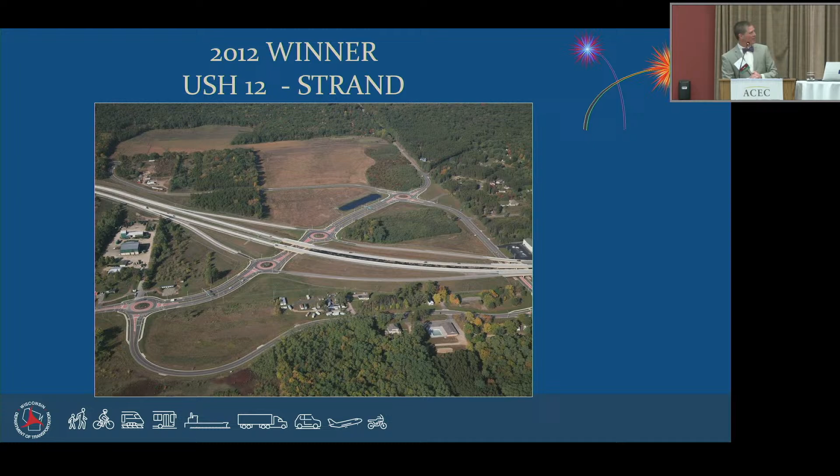13 years ago. Our presentation tonight, the purpose is twofold: to recognize the hard-working people, the teams who've created these projects, and to share some of these far-reaching and really quite different projects from all around the state. Another good field this year, we had 27 nominees. That's tied with last year.

We know from the employee survey that recognition is really important to people. This is just one way, and it's encouraging that you are putting your best foot forward to nominate your projects. Thank you very much to the judges who volunteered their time to review the nominations and judge them based on our published criteria. Thanks especially to Greg, Diego, and Nick, who were all new judges this year. Thank you. The only drawback with the judges this year, I happened to have 8, somewhat accidentally, and we'll see how that shook out.

The criteria for the contest, it's aligned with the department's priorities. We've looked again and again at these criteria year over year so that it's not just big projects that can win these awards. It's projects that find problems, they clearly identify problems, and find efficient ways to solve them. So whether you're taking home hardware today or not, you took the time to nominate your project, and so I'm pleased to be here to share it with the world.

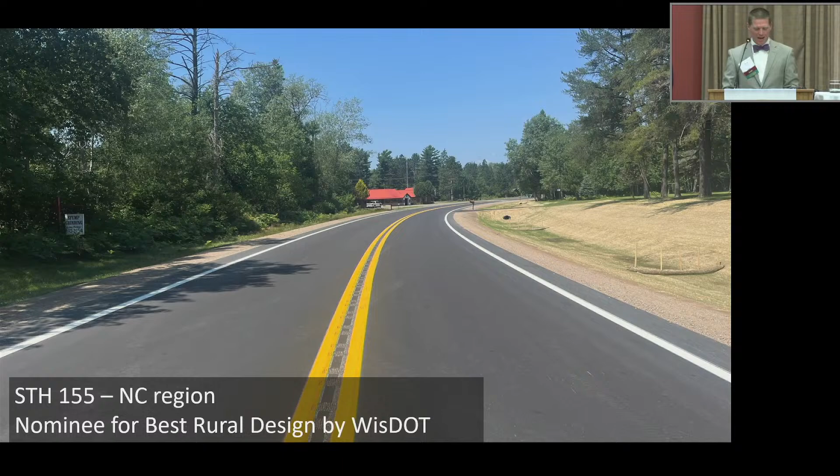All right, good. Well, who's ready to have a tour of Wisconsin's finest, shall we? Okay, our first category tonight, 4 nominees were in the Best Rural Design by WisDOT. Okay, here comes the text. The North Central region nominated State Trunk 155 in and around St. Germain, a scenic route symbolizing northern Wisconsin's beauty with rolling hills and natural waterways and sprawling forest. That is a quote from their nomination, thanks to Andy Casper and Stacy Hagenbutcher.

At its heart, this is a resurfacing project, but it also addressed a few specific problems, including flooding with right-of-way less than 15 feet from the shoulders. They used culverts and infiltration trenches to manage the water. The town of St. Germain contributed to shoulder widening, which will give people a place to walk.

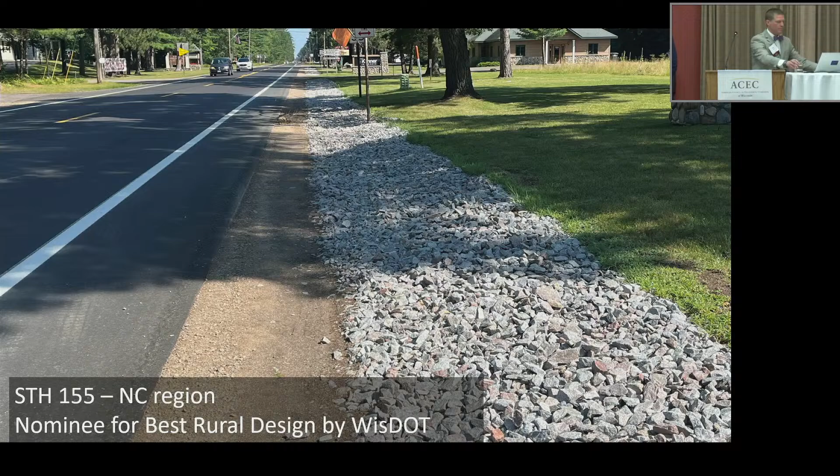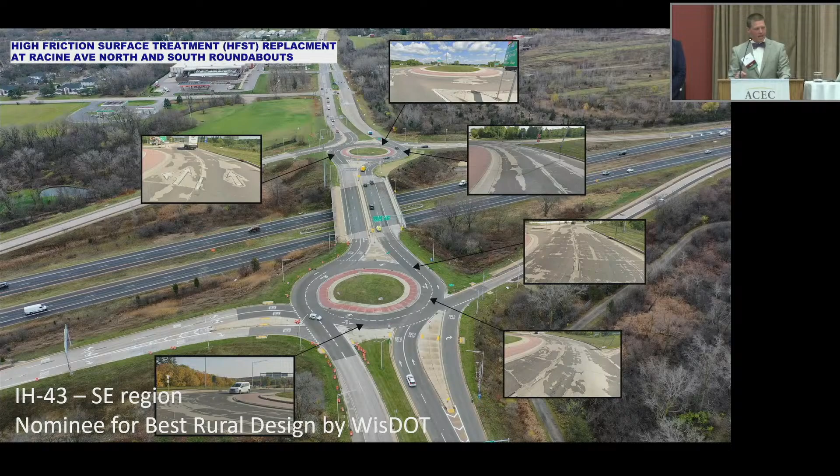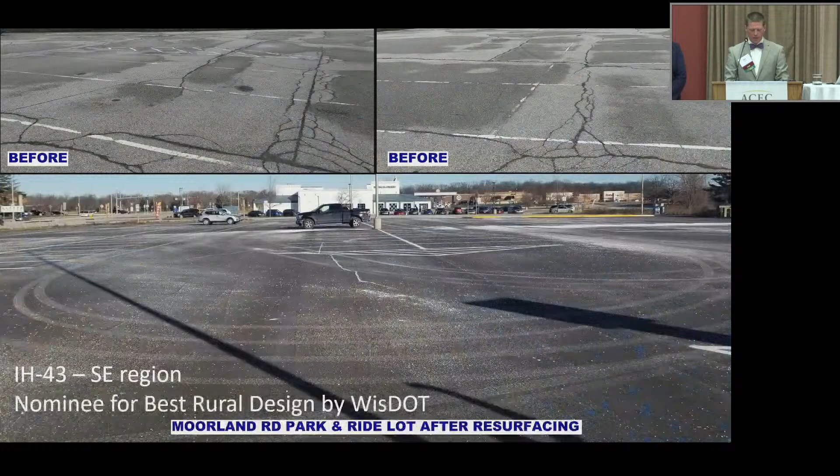The second nominee is a 6-mile project on I-43 in Waukesha County, sent in by Evan Limberatos and his team at Southeast Region. It was straightforward perpetuation, but the judges appreciated how each element was explained, each element had its purpose. Safety elements like new roadside hardware and a high-friction surface treatment were included, as well as updates to a park and ride and curb ramps. One thing that I thought was cool was specifying micro-milling for a portion of the shoulders so that when traffic was shifted onto them, it rode better and made less noise.

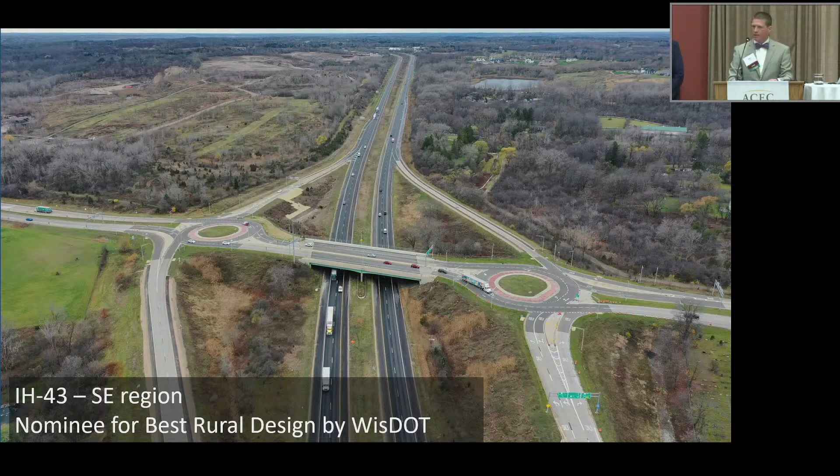Third, I'd like to share the Southwest region's State Trunk 58 project near La Valle. The main goal of the project, like many, was to extend the service life of the pavement. But the village of La Valle had suffered from flooding in 2018, leaving roads damaged and sidewalks disconnected. The project restored connectivity in 3 different small communities. The traffic control was designed for half at a time with temp signals to avoid a long and arduous detour. So thanks especially to PM David Schmidt and PL Anthony Johnson for your work on this project.

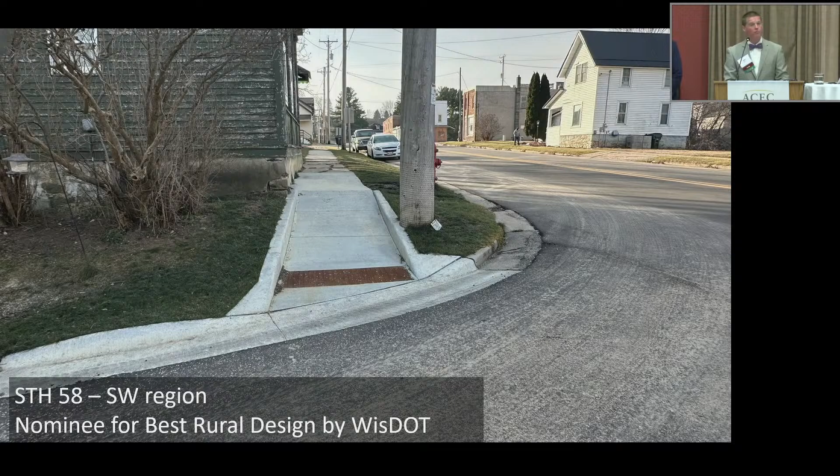The fourth nominee is the Northeast Region's project on State Trunk 15 and 76 in New London. It expanded 2.8 miles of rural principal arterial and caught the judges' eyes with safety improvements, access coordination, and tight bids. Well, come on down, Alan Farrell and Bill Bertrand. You are this year's first winners.

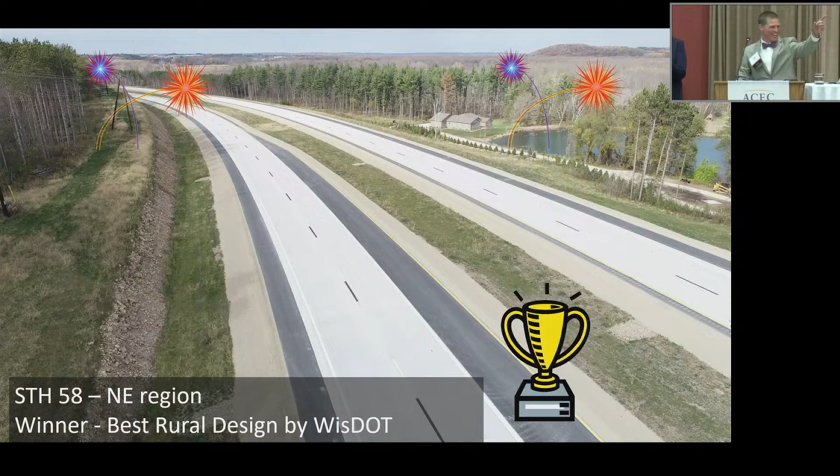Rural by WisDOT. One of the things we really want to hear about in the Design Award nomination is, what problems did you solve? And what alternatives did you consider? And while some people still really want to write no build, resurface, reconstruct, here's a good example of the kind of specific thing that we're looking for.

There were similar efforts with a concrete production facility and a landscaping nursery and other neighbors, balancing access and highway safety. In the end, 14 out of 45 driveways were able to be removed, which is expected to reduce the higher than average crash rate. The design team also worked through railroad coordination, rock excavation, and more on this $15 million project. Congratulations, Northeast Region.

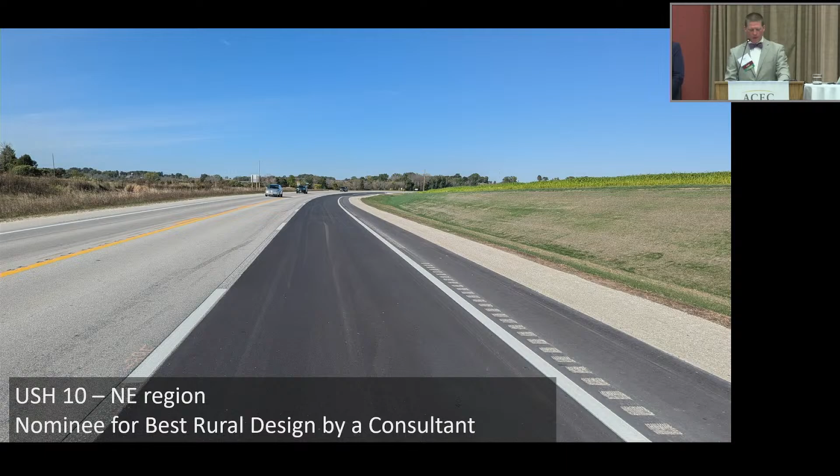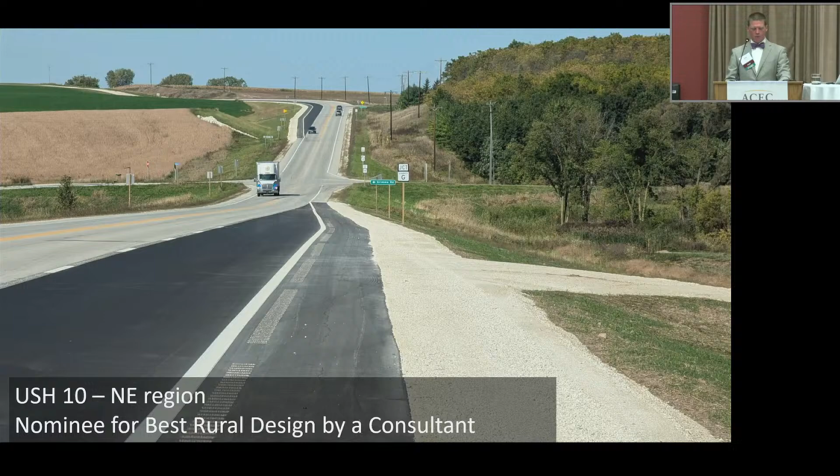All right, our next category is Best Rural Design by a Consultant. Let's head over to the consultant side of the house and look at 4 more exemplary projects. Northeast Region nominated their US 10 passing lane project in Manitowoc County. This was a $3.4 million project on about 4 miles of a major US highway, carrying 22% trucks, but usually only needing 2 lanes. It implements a portion of the statewide plan for designated passing lane corridors. Overall, the scheme is an efficient way to add capacity without extra rebuilding.

One specific decision was to collect rock data. Minimizing impacts to rock helped the project avoid an estimated $500,000 of cost. Well done, Stephanie Christensen from EMCS and Brian Hain from WisDOT. The next project had been in the works for 20 years before Valbon Latifi from Bloom and Robert Bellin from WisDOT brought it to fruition.

I'm not pointing any fingers, guys. I hear chuckling up front. That's how it goes sometimes.

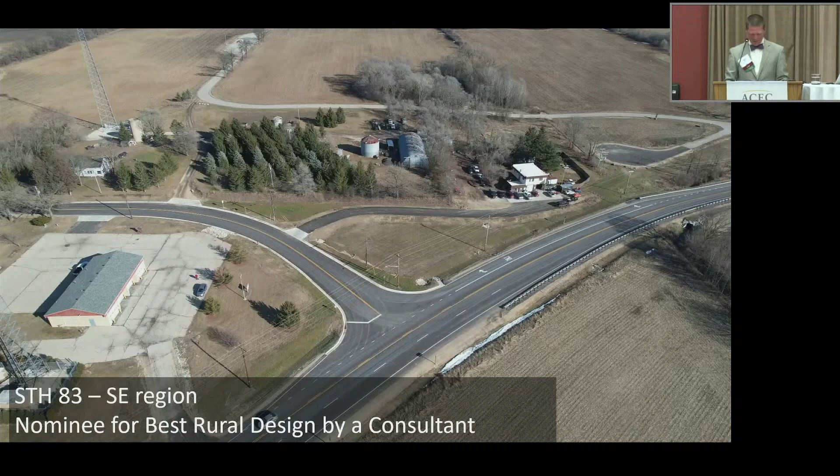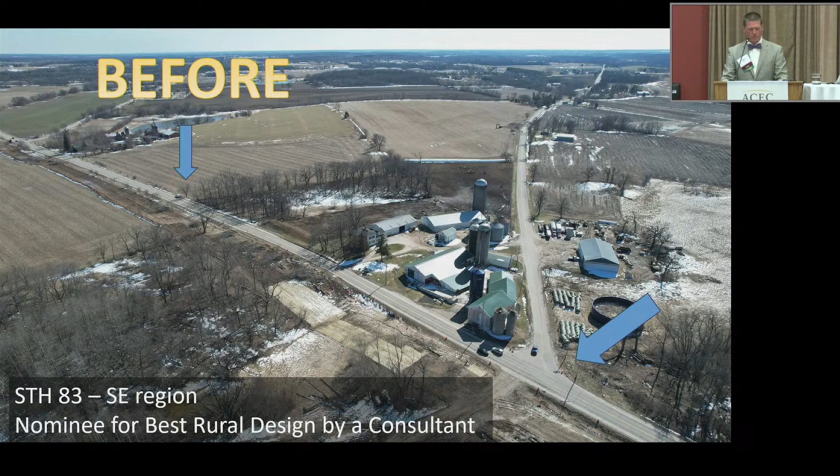It's Highway 83 between Waterford and Mukwonago in the Southeast Region. 3 intersections and 1 horizontal curve were reconstructed, and the rest was resurfaced, focusing the work on areas with crash problems. One example was the Honey Creek intersection. It was moved 950 feet to the south, the driveway opening was provided to the new alignment, and new beam guard was placed at the old intersection to delineate and reduce impacts to the farmer's property.

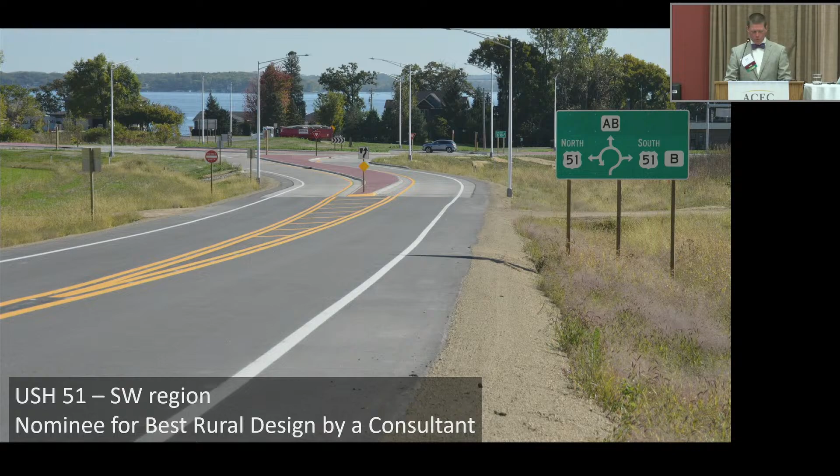Strand and the Southwest Region nominated the intersection of US 51 and County AB in the town of Dunn. This intersection received HSIP funding on account of its high crash rate and was rebuilt from a 2-way stop to a single-lane roundabout. The $3.3 million project attracted 7 bidders, the lowest of which were less than $20,000 apart. Thanks to Kyle Henderson from Strand and Jenny Coburn from WisDOT for this nomination.

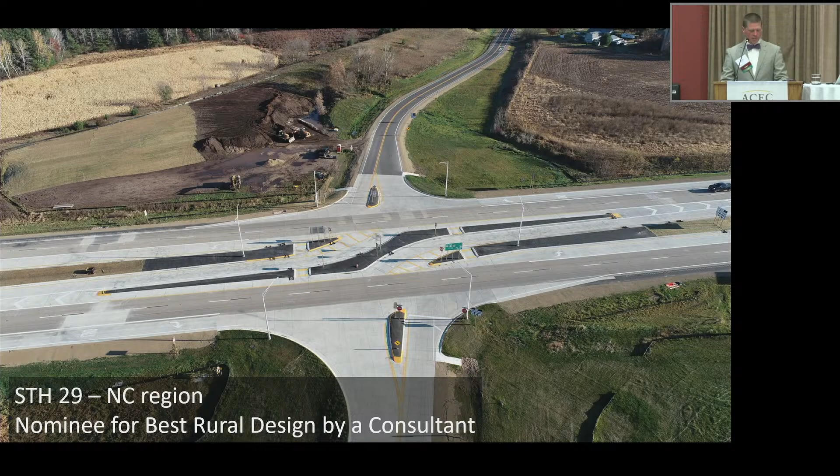Finally, we have the North Central Region's nomination, State Trunk 29 in Shawano County. This new J-turn configuration specifically targets an ongoing trend of severe crashes while staying consistent with the long-term vision to convert 29 to a freeway. Well, ladies and gentlemen, come on down. Eric Olson from EMCS, Kai Keelan, and Evan Maves from North Central Region. You're the winners. Evan, come on down. There's a number of great things to highlight about this project.

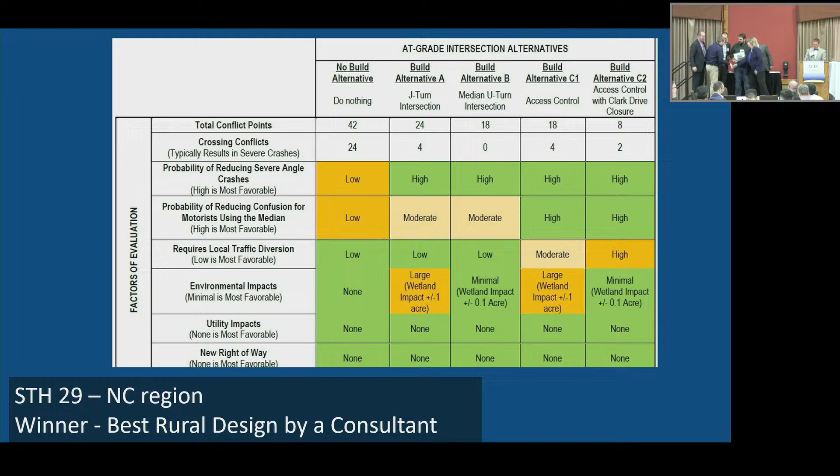It was driven by safety first and foremost. State Trunk 29, it's an important arterial with 27% trucks. County Triple M is a connection to the city of Shawano. It used to come in at a 63-degree skew. 4 at-grade alternatives were developed. They were also presented in the nomination in a convenient chart. Although not warranted at this time, an interchange concept was developed to show and talk with the public about. The J-turn, it maintains access, reduces conflict points, and does not preclude those future alternatives.

2 details I'd like to note quick. Offset right turn lanes were evaluated, but were not included because the volumes were low, and this wasn't part of the problem. So the decision to not include this work reduced impact and saved us about $250,000.

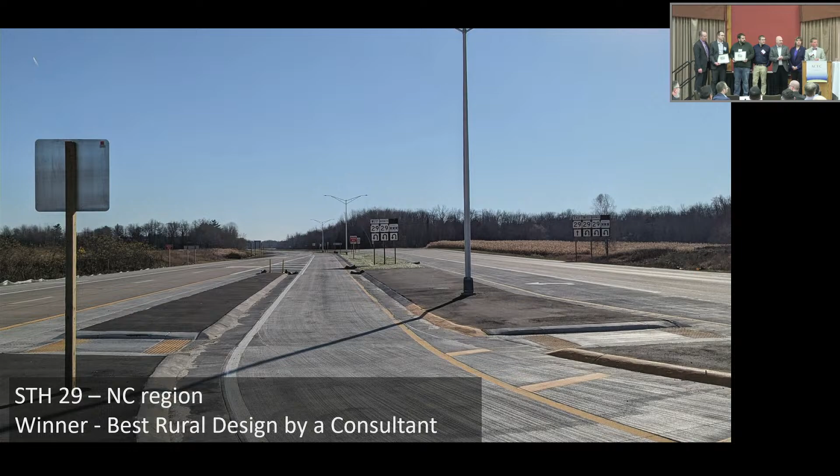And then finally, just a little detail here. Many of you have seen this already, but in case you haven't, with an intersection like this, even though it's rural, you might expect some people to walk or bike along the minor road. So the design includes these little cut-throughs in the medians, which are a really low-cost way to avoid creating a new barrier with our project. Congratulations to the State Trunk 29 design team.

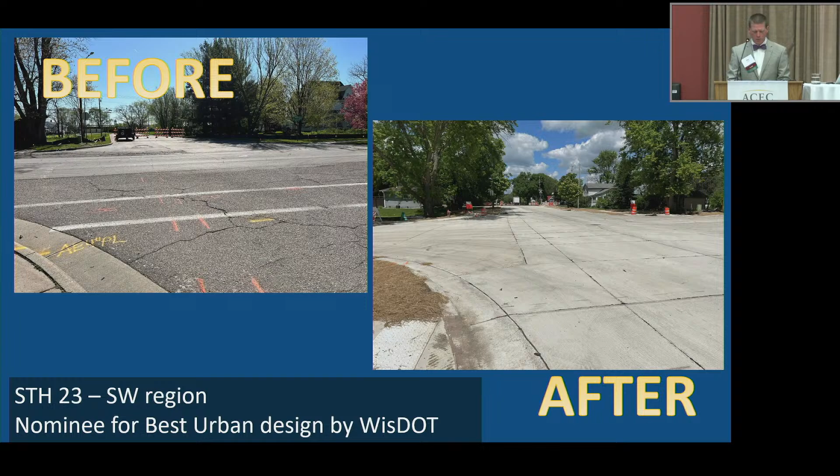All right, let's have a look at urban projects. Urban project designed by WisDOT was the smallest category this year, so let's have a look at these nominees. Southwest Region and Joshua Kaepernick nominated State Trunk 23 in Sauk County. It's a prominent corridor to the vibrant tourism destination of Spring Green and the only way to access a local industrial park. It's mostly mill and overlay with some reconstruction, including the Madison Street intersection. The nomination reports on cost savings from building this intersection under a full closure.

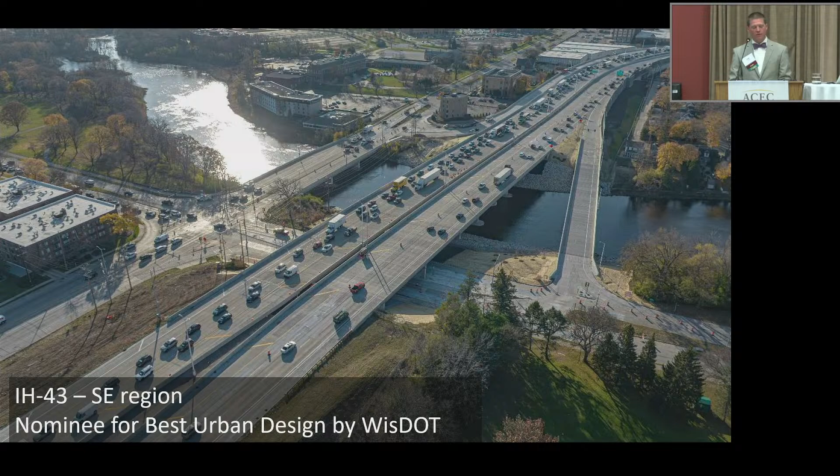The second nomination comes from the Southeast Region, a complex 1.4-mile interstate reconstruction of I-43 north of Milwaukee. Come on down, Dave Pittman and Roberto Gutierrez. You're this year's winners.

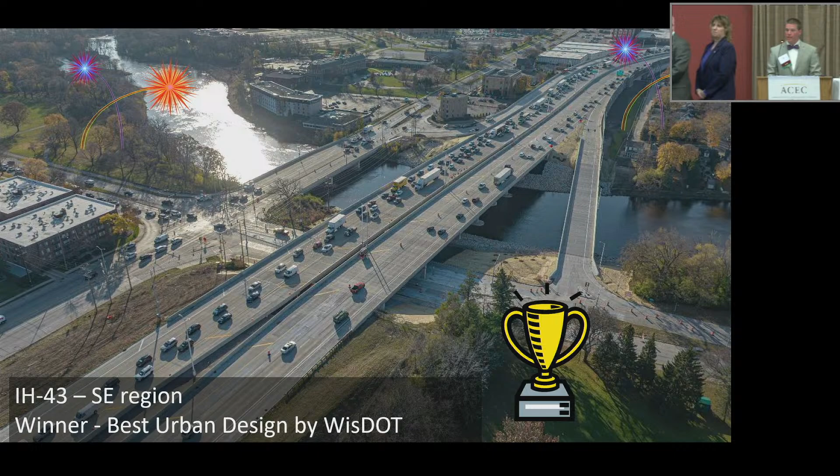This project most notably removed an old bridge above the abandoned Union Refrigerator Transit Company rail yard and replaced it with a lowered section of roadway between 2 retaining walls. They analyzed many components, including profile, ramps, bridges, and more. Removing an old 1,500-foot bridge will certainly reduce ongoing maintenance. I remember this project from our value engineering study back in 2019, which yielded about $6 million in cost avoidance.

Although I wonder why you guys didn't put that in your nomination, but nevertheless, a proposed alignment shift meant acquiring and moving 2 cell towers. I thought this was interesting. A cell on wheels device was used during construction to maintain that service. A portion of a cemetery was acquired, which included hiring an archaeologist and some design adjustments.

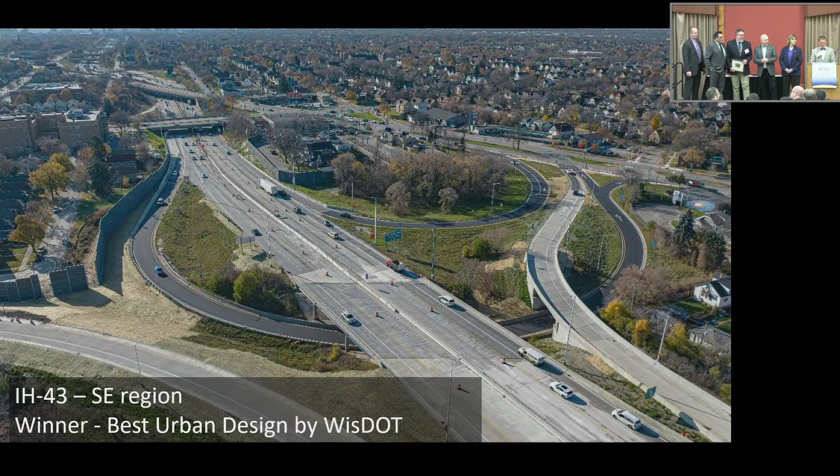And then finally, as you might expect in an urban area, popular trails cross this area as well. So with the removal of the bridge came a new barrier, mitigated with a new culvert that will serve as a trail underpass when the trail is built along that old rail line. Congratulations, Dave and Bob and your team.

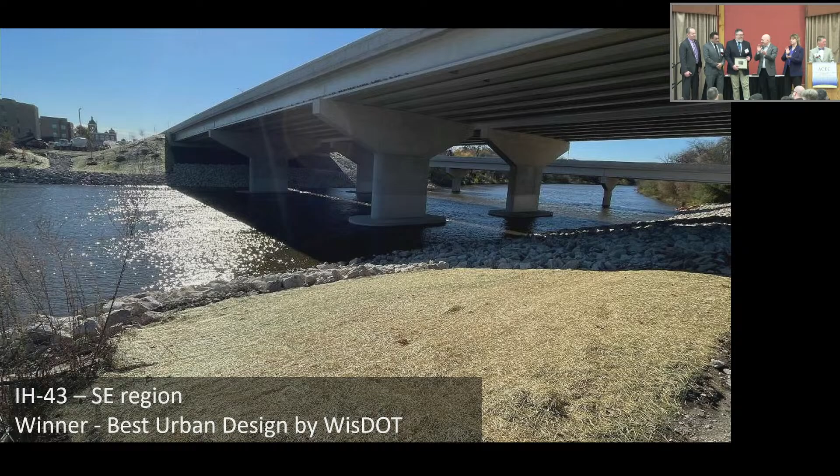Our next category is Best Urban Design by a Consultant. We have 4 strong projects in this category. Let's have a look. We'll kick it off with North Central Region, where State Trunk 80 was the nomination in Babcock. In this nomination, Jim Wendels calls the project small but mighty, and he's right. Along with WisDOT PM Preston Bone, Quest delivered a project that realigned a 10-mile-an-hour curve in this small town while resurfacing 5 miles of rural highway. Before the project, there were no crosswalks across State Trunk 80 and no pedestrian access to the post office or town hall. The judges appreciated the discussion on sub-alternatives and elements of performance-based practical design throughout.

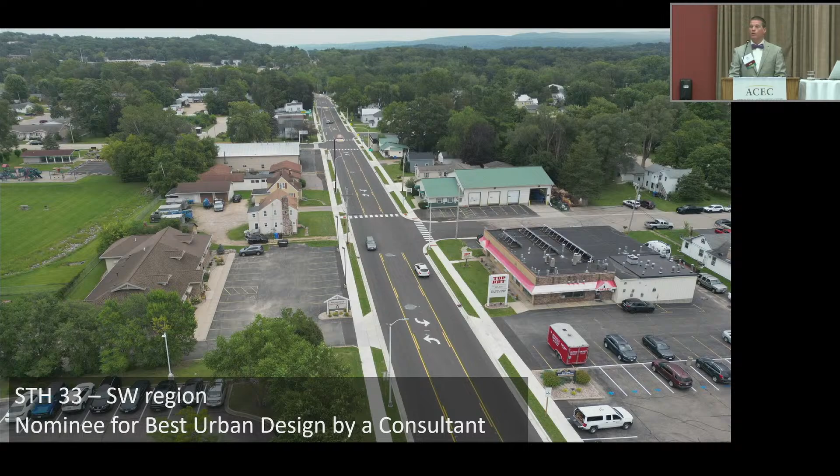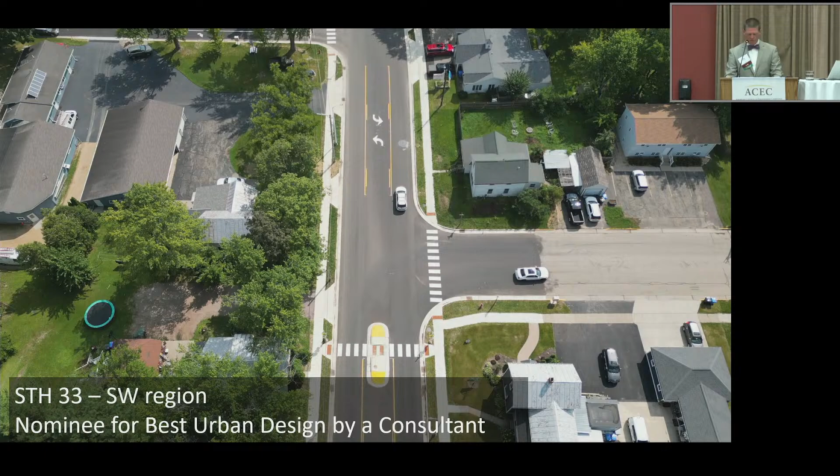And the second nominee is State Trunk 33 in Baraboo, sent by Brett Peterson at OES and Greg Brecka of the Southwest region. In the course of this pavement replacement project, the lanes were reconfigured from 4 to 3, a classic road diet that's expected to reduce crashes while maintaining or even improving access with a good level of service. The urban setting included 150 new curb ramps. As you know, probably the strongest thing about a road diet is all its safety benefit for cars and pedestrians within the existing footprint.

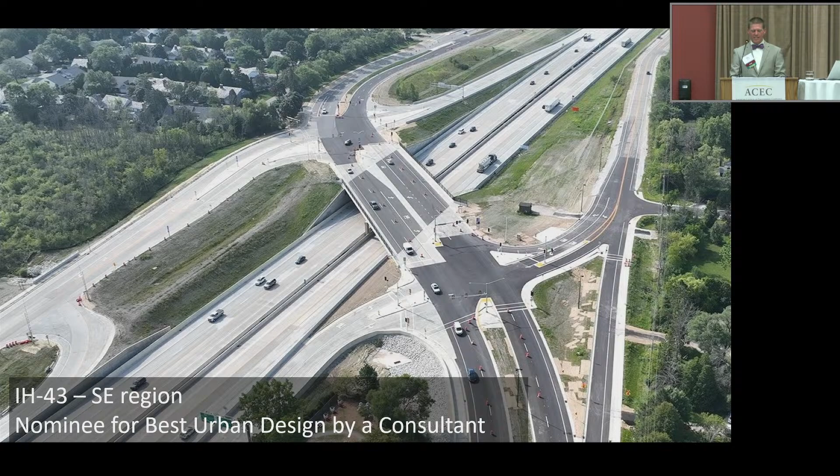Our next nominee comes from the Southeast region, the I-43 County Line Road interchange. It also includes a road diet and box culvert work, strategic staging, and complex geometry. And it's this year's winner. Come on down. Ryan Yankee from HNTB, Gary Ferguson from Jacobs, Steve Hoff, David Wen from WisDOT. And of course, if you're in the audience tonight and I call some names and you belong up here on the stage, please come on up. If I did not call your project, please refrain.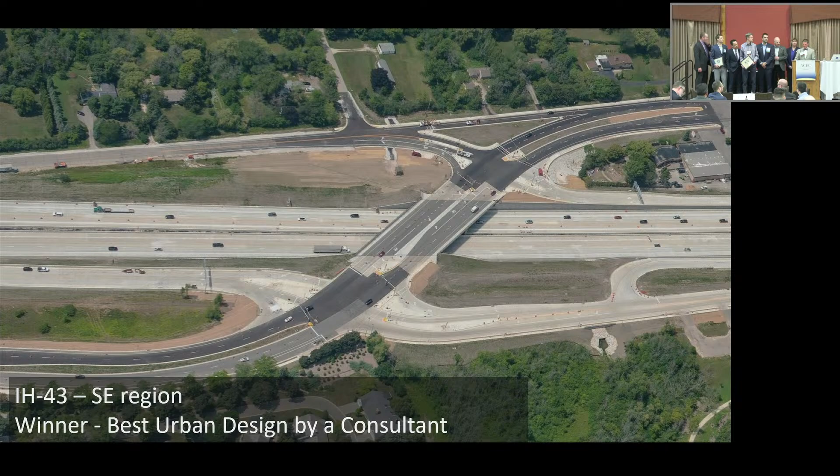This design on I-43 in the Southeast looked at numerous interchange alternatives driven in large part by FHWA's requirement for a full access interchange. The existing I-43 alignment under County Line Road had a substandard 60-mile-an-hour compound curve, which was improved to 75. Safety improvements were made for both vehicular and pedestrian traffic, including a new shared use path in coordination with the locals. Environmental impacts were mitigated with incorporating measures such as stormwater management, reducing impacts on wetlands and 4F properties. Finally, a reconfiguration on the local Port Washington Road is expected to better serve the community and promote accessibility. Congratulations to the I-43 team.

But wait, if you're keeping track at home, I've announced a winner, but only 3 out of the 4 nominees. Well, ladies and gentlemen, for the first time I've ever been a part of, the judges went round and round, and we concluded it's a tie. The Northeast region, State Trunk 54 in the city of Seymour is also the winner, so come on down, Kevin Kulo and Troy Robillard from Ayres, Jesse Hansen and Tammy Rabe from WisDOT. Come on down, Northeast region.

Be recruiting one more judge next year. No, all joking aside, this is a great project. Thanks for coming down. I also learned that senior designer Phil Verville unfortunately isn't here because of a recent injury, so get well soon, Phil.

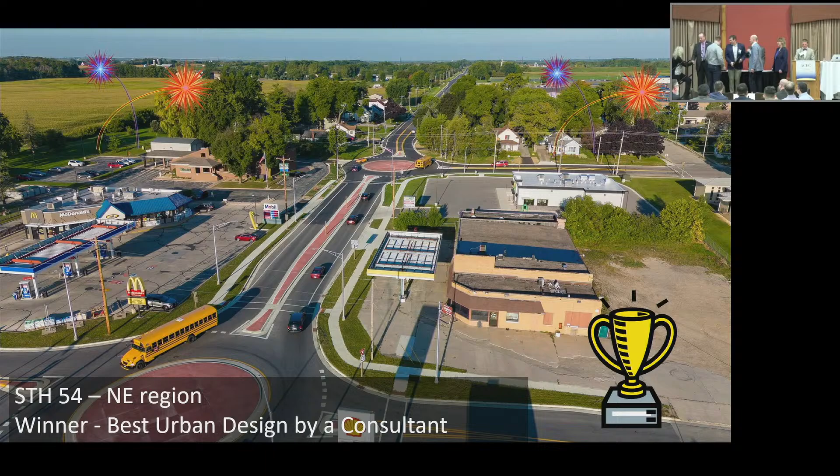This project is notable because it constructed the first and the second compact roundabouts on the state highway system in Wisconsin. Just look at these beauties. I think the project also included some resurfacing too, but the nomination didn't really expand on it, probably because they were so excited about the roundabouts. As you can see, this is quite a constrained area, and yet the 2 intersections had a lot of crash problems and problems with the level of service.

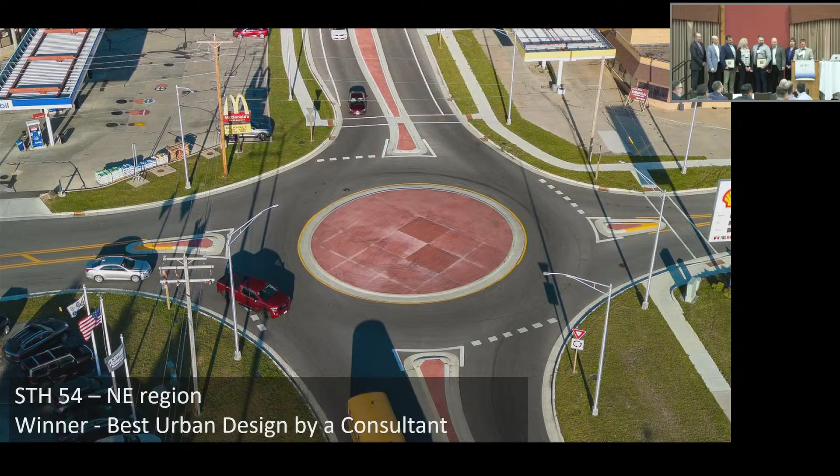These compact roundabouts are expected to reduce crashes and improve the operation while minimizing business impacts. You can also see that trucks are running through them just fine. Pedestrians will benefit from the new sidewalks.

And finally, I saw on the sign that Seymour is the home of the hamburger. I had no idea. Did you know this? I confirmed this with Google, and ChatGPT thinks it's New Haven, but did agree that Seymour has a legitimate claim. So either way, head on over to Seymour, see it for yourself, and if you miss it, just U-turn in the new roundabout. Congratulations.

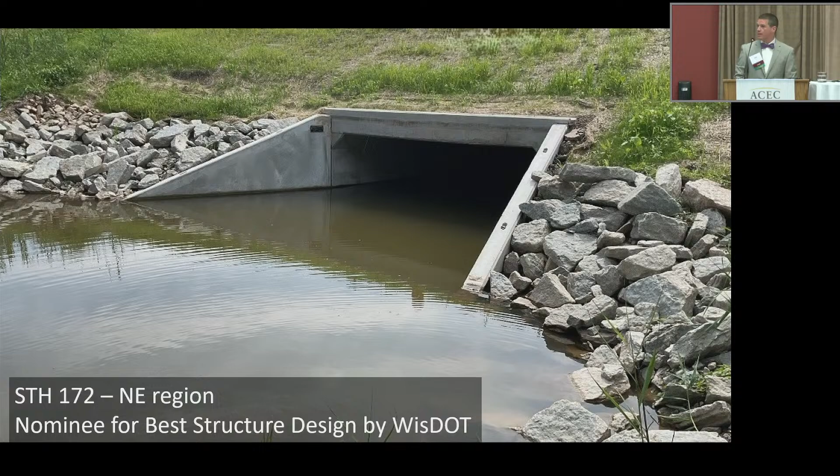Bureau of Structures and friends who love structures, get ready, because here come the bridges. First, by WisDOT, we have 4 nominees in the Best Structure by WisDOT category. First, Northeast Region nominated this new culvert under State Trunk 172 in Brown County. It's a great example of perhaps the most important key to success in a structure project: good collaboration between the Bureau and the region. The existing steel plate pipe arch was rusted out with some areas of 100% section loss.

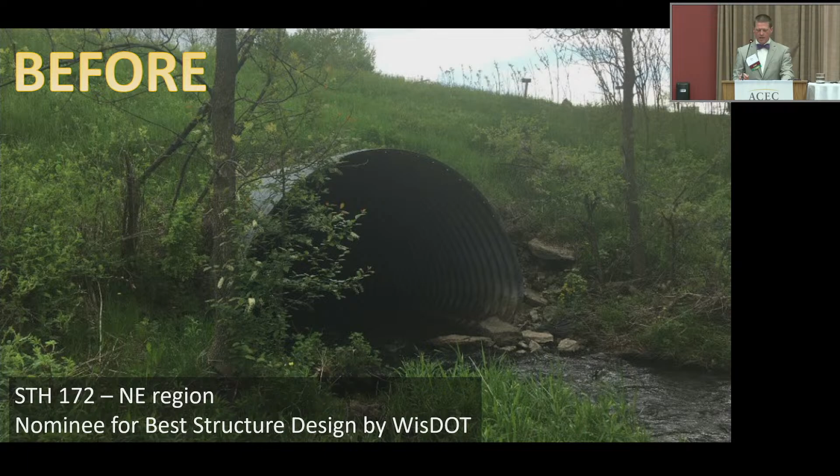A bridge and a box were analyzed, considering poor soils and utilities. Partnering with the Oneida Nation was another key to success. Finally, when the contractor proposed to precast the culvert, BOS Fabrication Unit quickly reviewed and accepted the proposal, reducing construction and detour time. Especially kudos to Joshua Lang and Isatu Cisse.

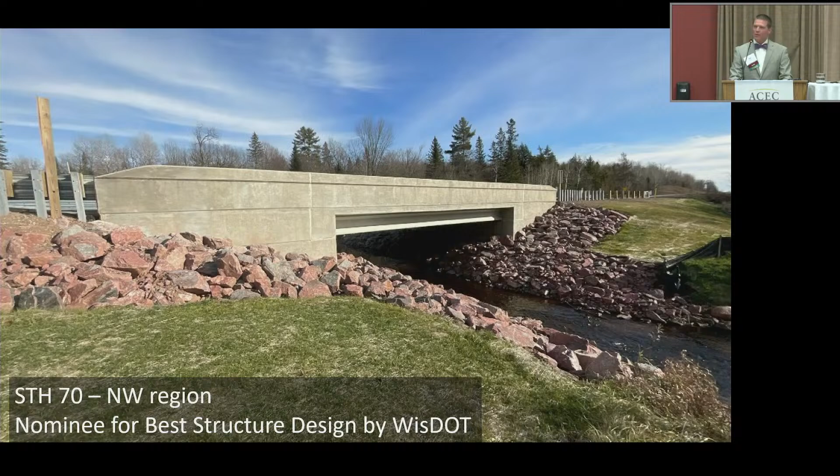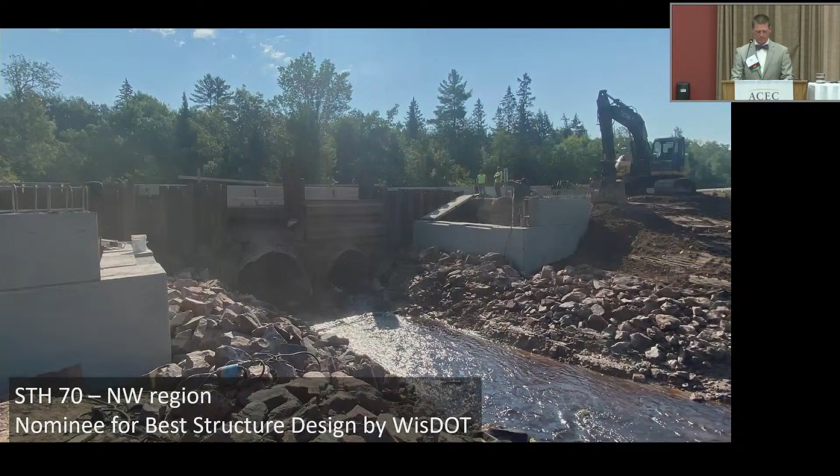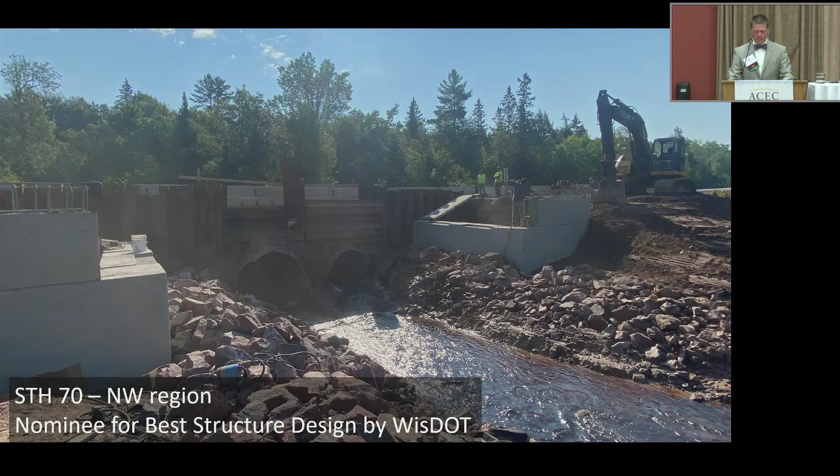Northwest Region also replaced an old twin steel culvert with this new bridge on a beautiful remote stretch of State Trunk 70 through the Flambeau River State Forest. The design focused both on the traffic up above and the stream down below, which was prone to debris buildup. The new robust bridge is expected to improve fish passage and have minimal maintenance issues over the next 75+ years. It was also designed for constructability, carefully placing the girders, joints, and reinforcement. We recognize Matthew Dickinson and Ian Linloff and their teams for this nomination.

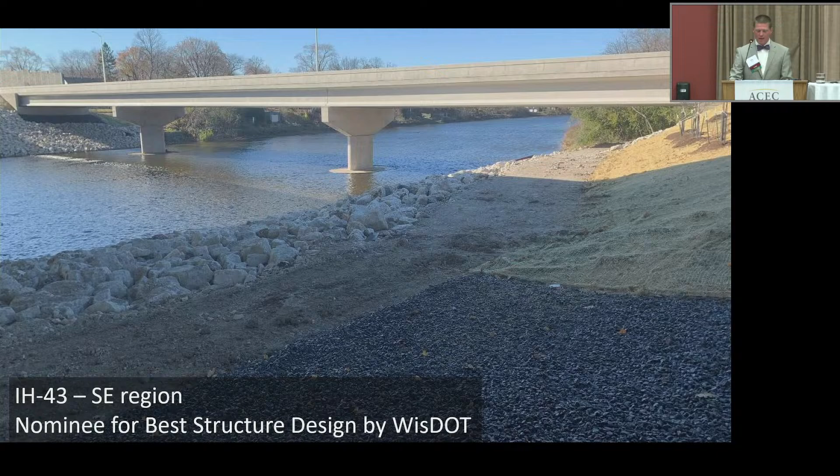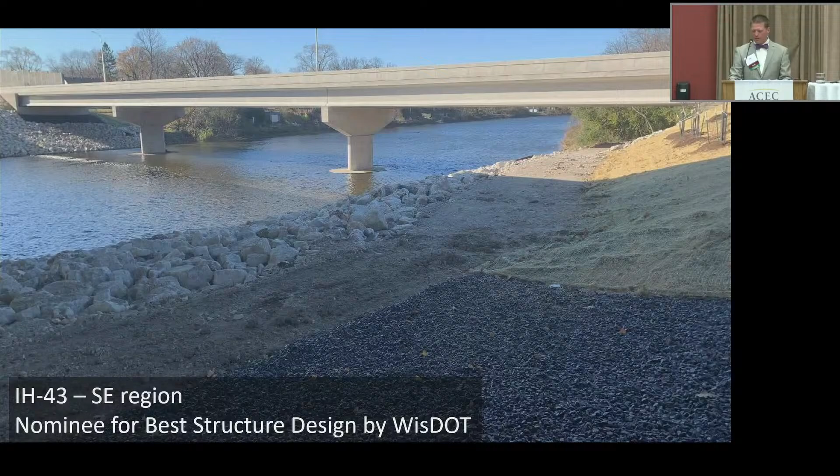Our next project garnered several votes from the judges for its structural accomplishment. This 350-foot span over the Milwaukee River, right next to the I-43 URT project that just took home the Best Urban Design project. They're right next to each other. The bedrock is shallow here in the Milwaukee riverbed, so this bridge uses hammerhead piers on spread foundation keyed directly into the bedrock. Piles were pre-bored into rock with modified A3 expansion abutments and non-standard pile analysis. You already met Dave Pittman, and let's also acknowledge Max Kulik from BOS for his work on this project.

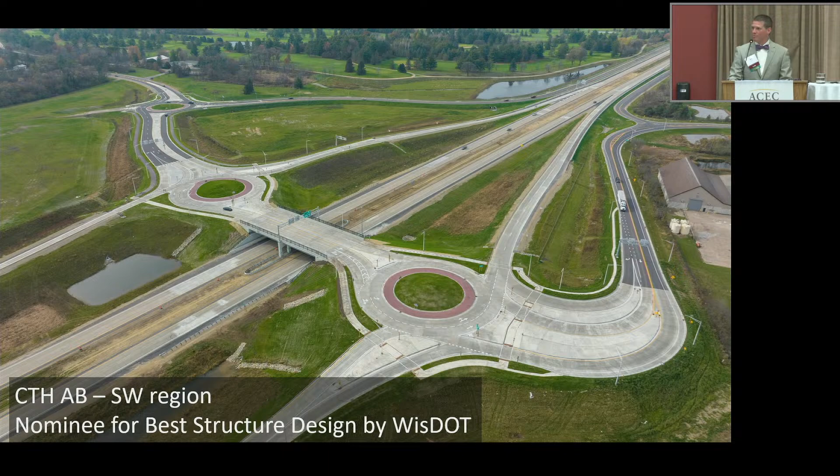Our final contestant is the new County AB Bridge over US 12 on the east side of Madison in Dane County. Would you please come on down, Dominique Beckley and Kyle Bush from the Bureau of Structures. Derek Potter from the Southwest region, he was the PM. I don't believe Derek's here tonight. If you're watching the video, nice job, Derek.

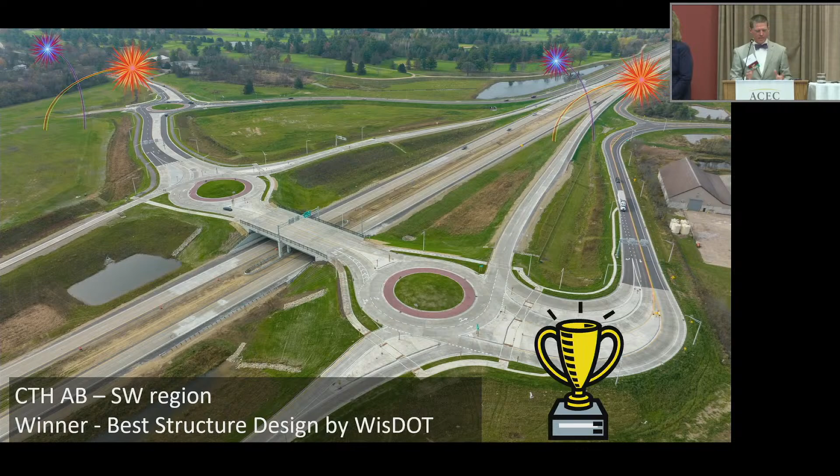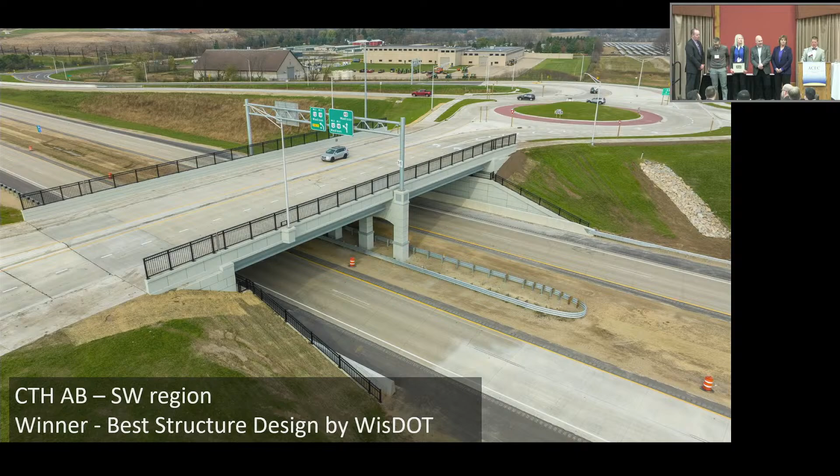This is part of a whole new interchange with roundabouts and access updates expected to be a major safety improvement. But this category is about the structure itself. There are 2 MSE walls at the abutments and 10 sign structures here, along with the 2-span concrete girder bridge. Some of its features include raised sidewalk, median and shared use path, lighting, conduit, and aesthetic treatments to match the corridor. I'll mention briefly a few structural complexities here.

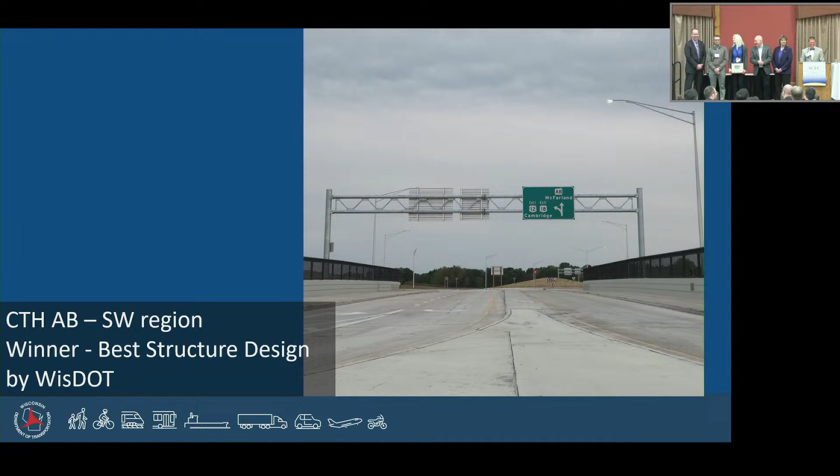Non-standard details were needed to address pile uplift demands in the exterior column footings. There was curved geometry in the structural approach slabs. Special pier pedestal designs and details were needed for the full span overhead sign structure. Hopefully all the structure engineers in the house are very pleased to hear about all these details. US 12 remained open throughout except for a few nighttime closures. If you find yourself down in the area, check it out. Great work, Southwest Region and Bureau of Structures. Congratulations.

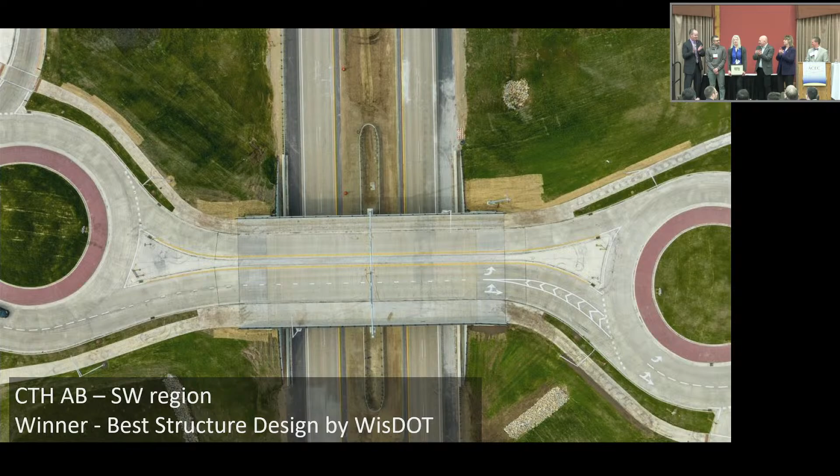Next, we'll go over to the consultant side of the house and look at 4 more fine structures. Many of the judges ranked all 4 of these very close to each other. I was speaking with somebody just before the presentation as well, just how hard it is to convey how much it's appreciated to judge all of these nominees. And in many cases, they end up really very close. So, of course, we pick 1, maybe 2 sometimes, but there's got to be a winner in the end. But I really want to highlight each of these nominees because they really do have a lot going for them. In a lot of cases, it's really, really difficult to pick that winner.

In this category, the Northeast region nominated one of the first structures on the I-41 major project, the Rose Hill Road overpass.

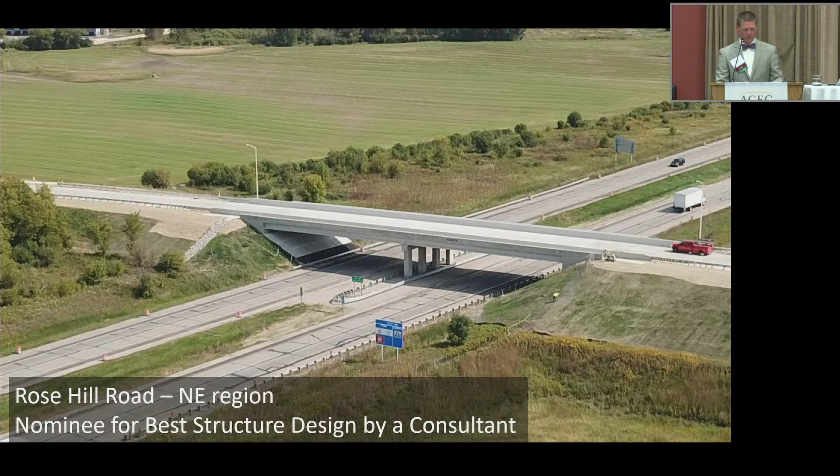Sarah Grimmie from Strand and Scott Ebel from WisDOT prepared this nomination. The new bridge is a two-span 45W pre-stressed girder structure with a widened deck that includes lanes, shoulders, and sidewalks, and a 208-foot overall length to accommodate the widened I-41 down below. Of note, this design was accelerated about a year when the old bridge was struck and damaged.

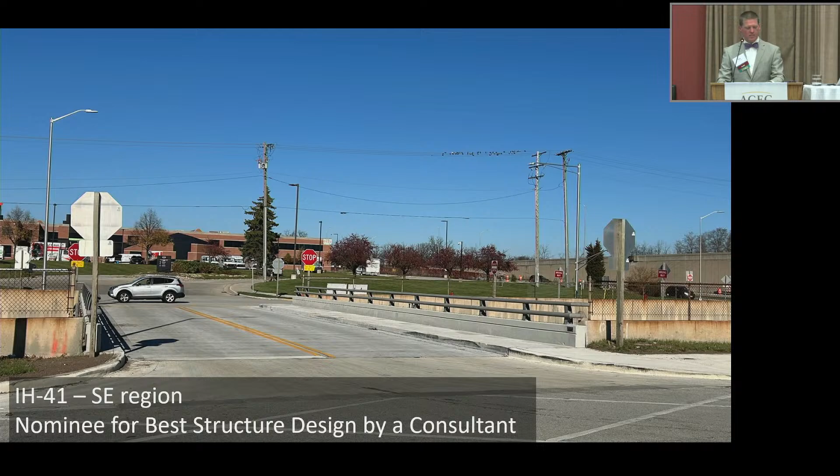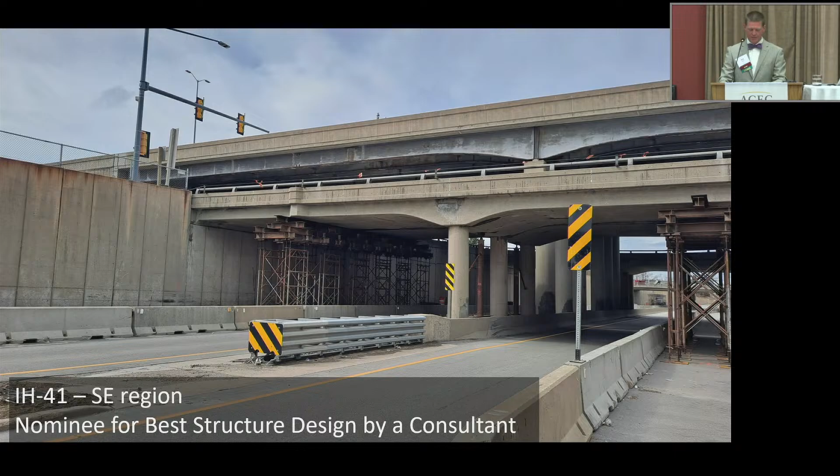The next nominee comes from the southeast region, also on I-41 down at the Capitol Drive interchange. This is a rehabilitation of 5 bridges in an urban environment, specifically a 3-level service interchange. It required a complex traffic staging plan to minimize impacts. The structural complexity here really comes from all the varying amounts of partial removals and rehabs.

For instance, thermal deck scans detected areas of debonding and delamination. Access for full deck replacement utilized safe span false work. Thanks to Pat Cashin at HNTB, Clayton Smith from WisDOT for nominating this fine project.

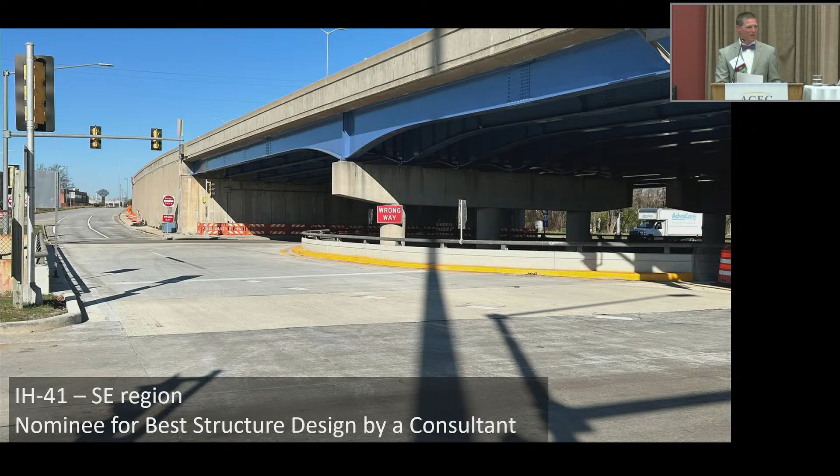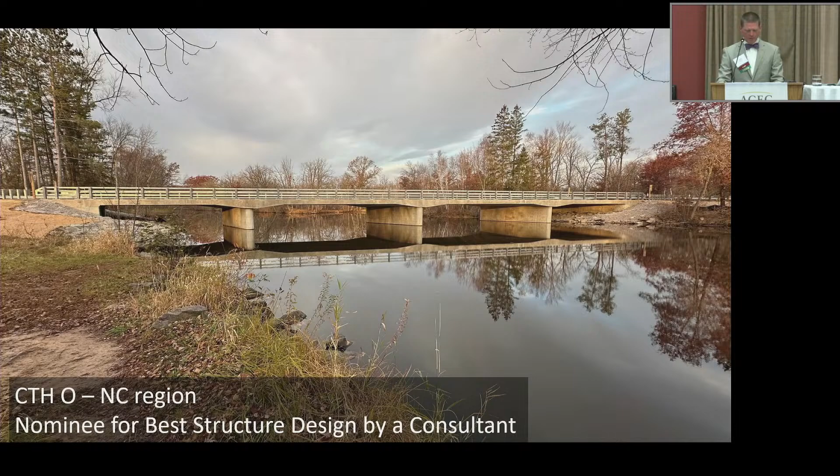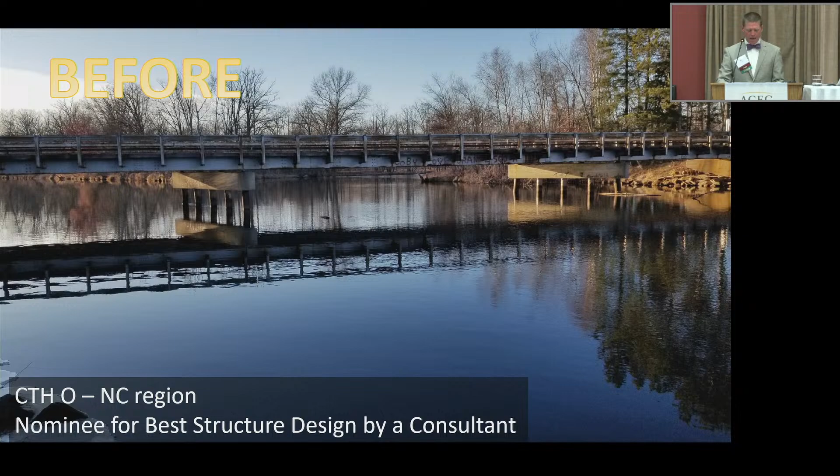North Central Region nominated their bridge replacement on County O in Marathon County, right through the George W. Mead Wildlife Area. Their mission was to replace the old bridge and minimize disruptions to the road and popular recreation area. Major alternatives weighed girder versus slabs. The slab was primarily selected based on buoyancy, resistance to debris impact, and navigational clearance.

Along the bank is an area for our non-human neighbors to pass under the highway as well. Thanks to James Rowe Drungalis from AECOM and Mike Grage from WisDOT for this nomination.

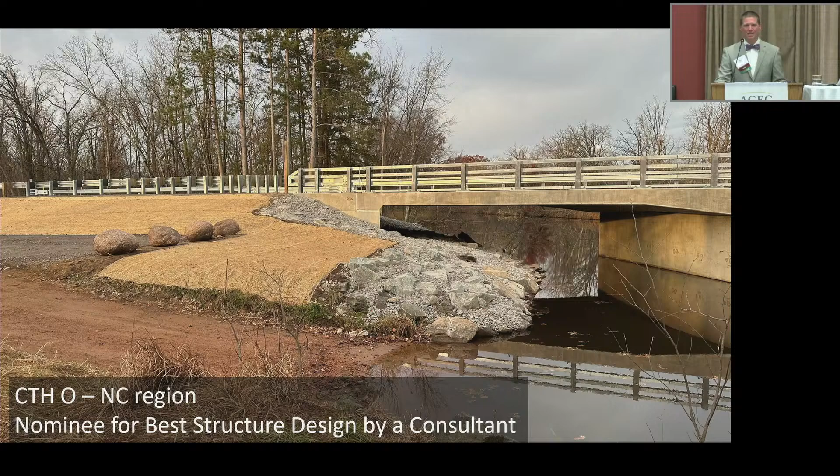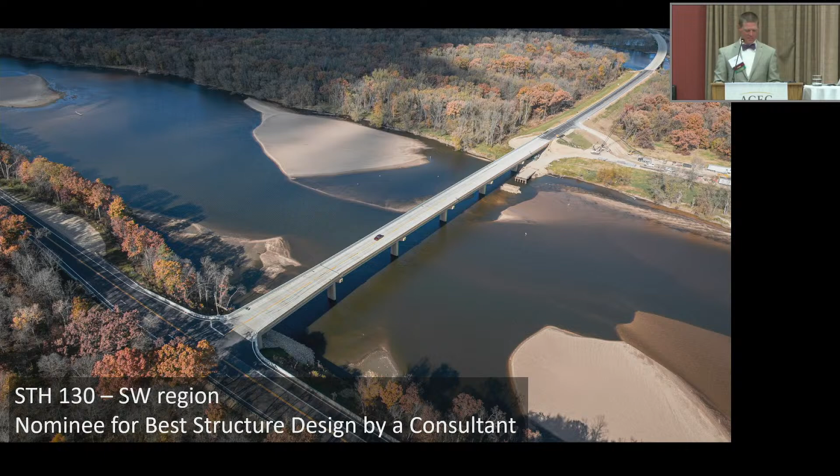And that brings us to the final nominee in this category, a structure that hopefully you're not sick of hearing about for all the attention that it's gotten recently, but maybe you've noticed that this really is something quite special. I think we have a large group of people here to receive this little plaque, so we'll see how it works on the stage. I have some copy, we'll see what we can do. So won't you please come on down.

Greg Brecker from WisDOT, Roland Hoslett from EXP, Don DeMars, Brian Jensko, Dan Schrum, Jeff Knudsen, Rachel Burnham, and Tim Borowski from SRF. That's it, the 130 Lone Rock Bridge. What a crew. If we can do it on the stage, we will. Otherwise, we'll stage the photo later on. Let's see how it works.

Meanwhile, I'll tell all of you a little more about this fine project on 130 in Lone Rock. Out in this area, there aren't many places to cross the Wisconsin River, so this is a really important bridge. The existing steel truss was built in the 1930s, and if you've ever been out there or been on it, you'd know how narrow it was, and low too. Many people also know the results of the rock wall at the end of the bridge, which has tragically been the site of numerous fatal crashes, including suicides.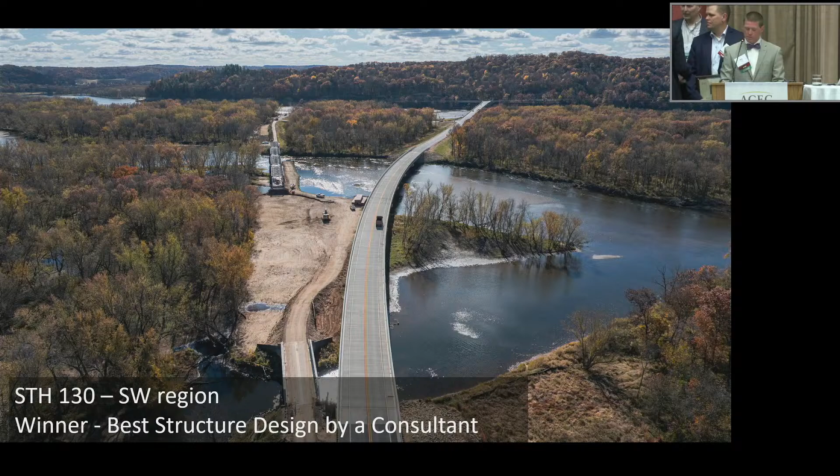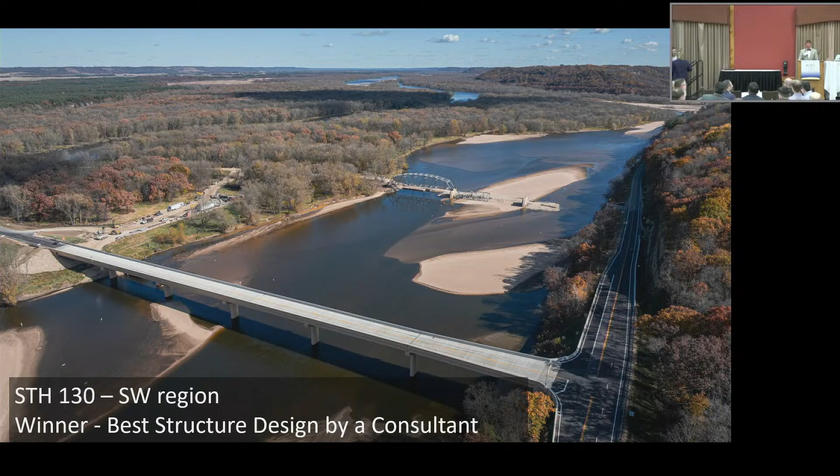This, combined with interactions with the river channel and many structural alternatives, led to a modern, durable structure on a new alignment. The Riverway Board was a key stakeholder, and the view from the river was as much a part as from the road. The view from the bridge is especially better for truck drivers or non-motorized users who really didn't fit the old bridge at all. Structure-wise, there was finite element modeling, higher strength concrete, and extra bedrock analysis.

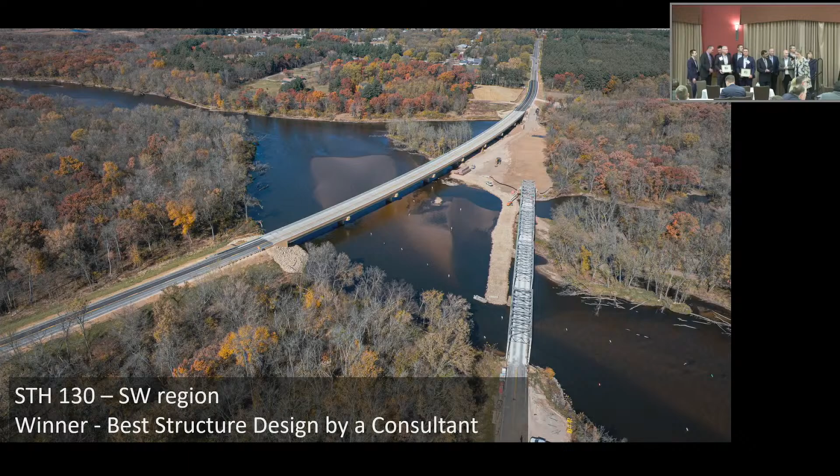I brought an extra paragraph just in case here. SRF was the designer in this design-build project, one of the few in recent Wisconsin history. They are proud to claim efficiencies from this method like $2 million and 12 weeks of construction time saved by reducing the number and changing the shape of piers. The project came in at about $37 million. We got it? Congratulations to the Lone Rock team.

Beautiful project. So here's our final category for the evening. Best Design in Local Program. This category has really shined since its creation back in 2017. So let's meet this year's contestants.

In Northwest region, in the town of Longwood, you'll find a new bridge over a branch of the Black River. Since it was a dead end, traffic control included a temporary structure. The new flat slab design is longer, allowing new abutments to be placed behind the existing ones. Thanks Aaron Palmer from Westbrook and Teresa Davis from WisDOT for this nomination.

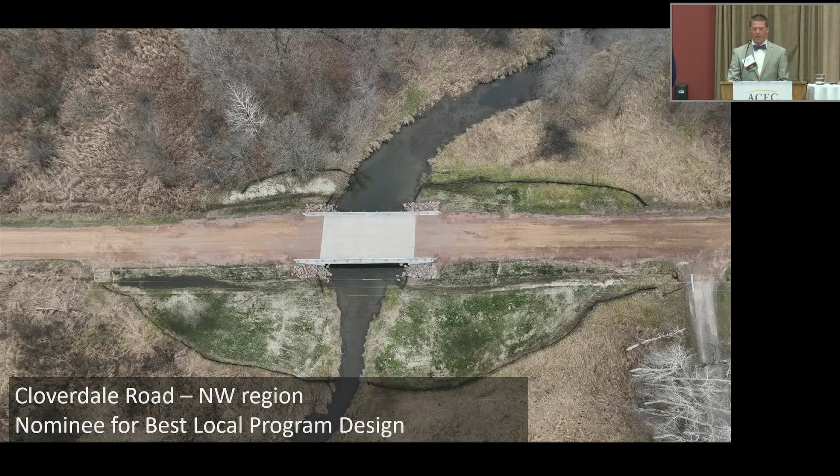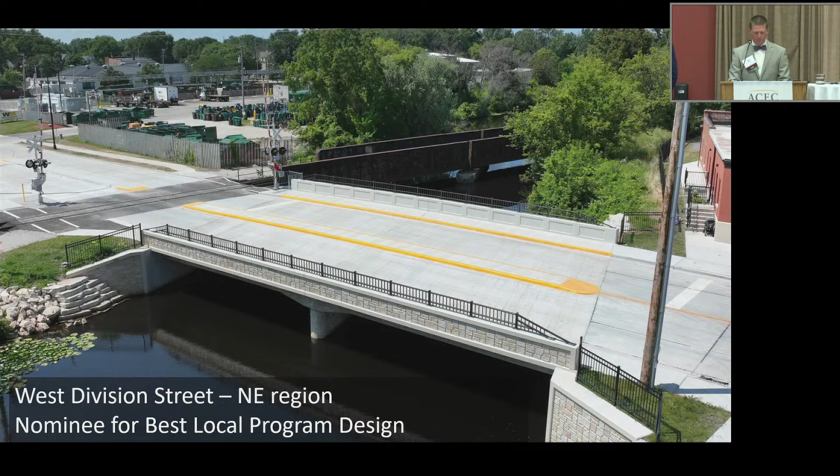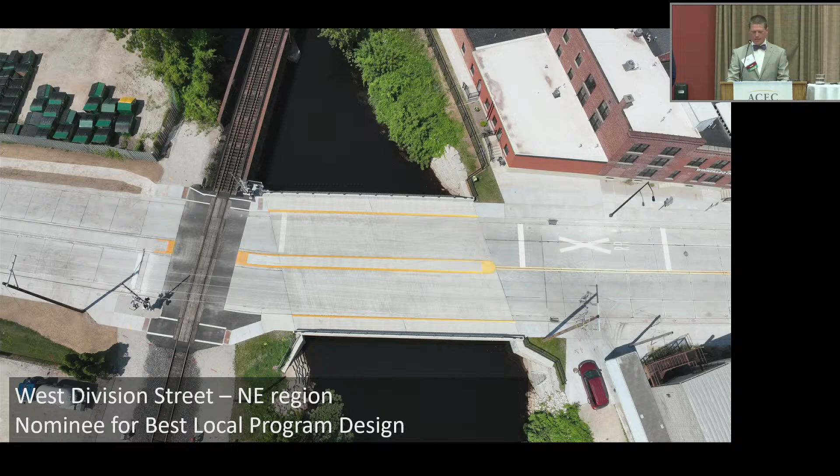Northeast Region nominated their West Division Street project in Fond du Lac. It was also this year's Construction Award winner for small structures, so I copied and pasted the description from that ceremony. The new structure is a 2-span slab bridge supported by cast-in-place piling. The west abutment was so close to the rail line that it was tied to the abutment of the adjacent railroad bridge, which sees over 45 trains a day. The existing west abutment was left in place and braced by boring tiebacks under the tracks to support them.

So well done, Q Klink from MSA and Jody Jarasinski as the local program project manager on this job from Northeast.

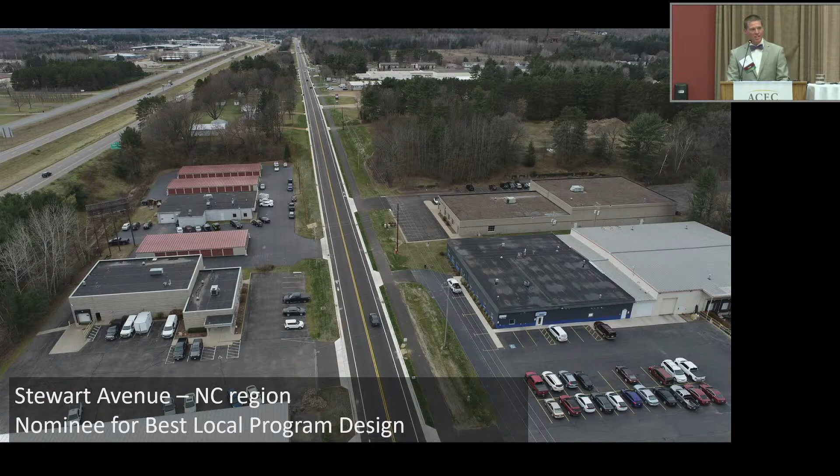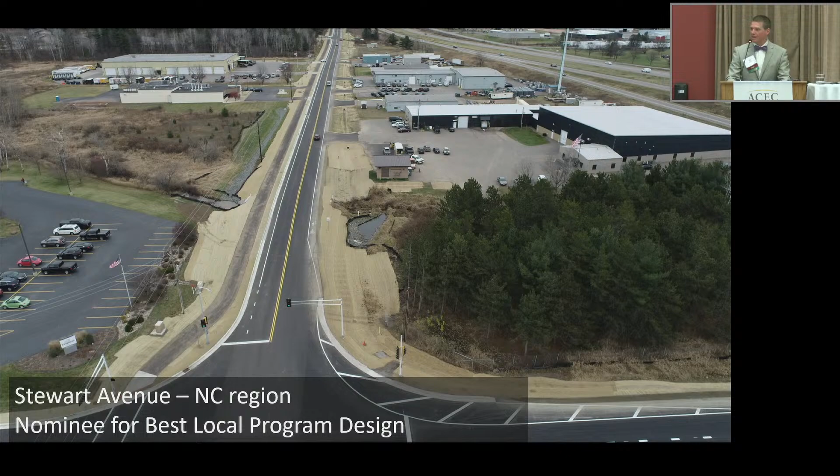From the North Central region comes the nomination for Stewart Avenue. This project, headed up by Stephanie Christensen at EMCS and Mike Grage from WisDOT, transformed an outdated 1.5-mile corridor serving the west side of Wausau. It replaced pavement, added drainage, and replaced outdated signals and municipal utilities while improving facilities for bicyclists and pedestrians too, including paved shoulders, urban paved shoulders, and a multi-use trail. To best fit the context, you'll see urban and combination urban and rural typical sections.

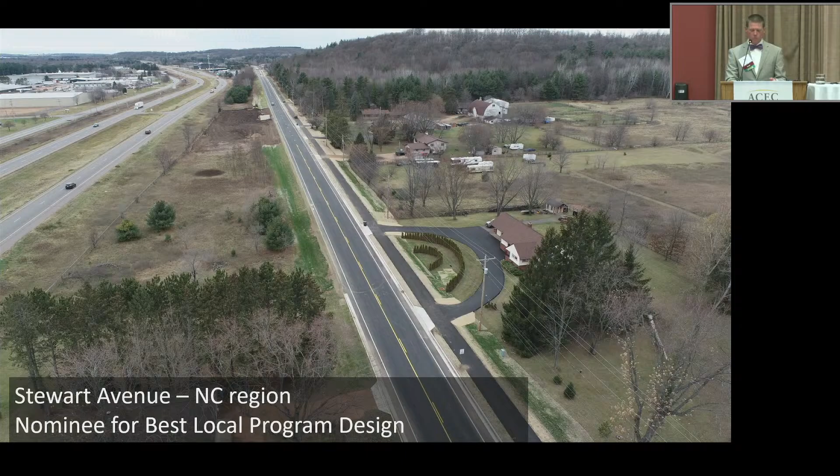Next, from the Southwest region, is the Lake Mendota Drive project. You hardly ever see a project like this when the existing timber bridge was built in 1892 and rebuilt in 1934. This is a low-speed, low-volume area in mature forest in a strong neighborhood committed to its history and beauty. The design team drew several alternatives and following 2 PIMs received a petition with more than 120 signatures favoring a new timber structure for their gateway to the lake.

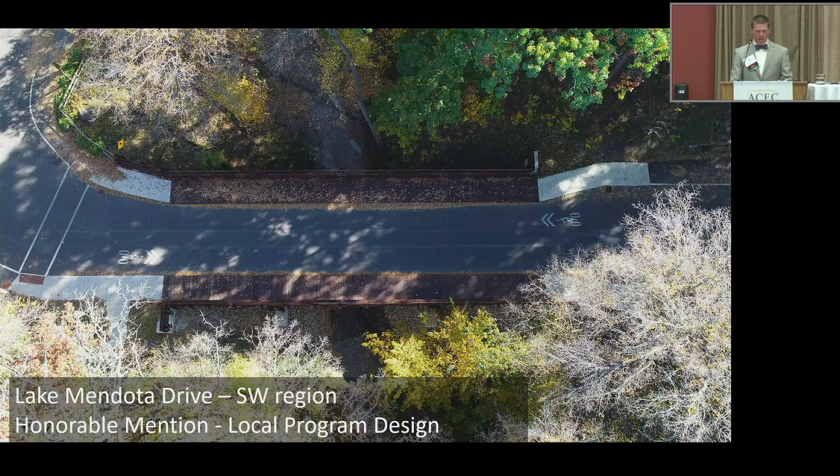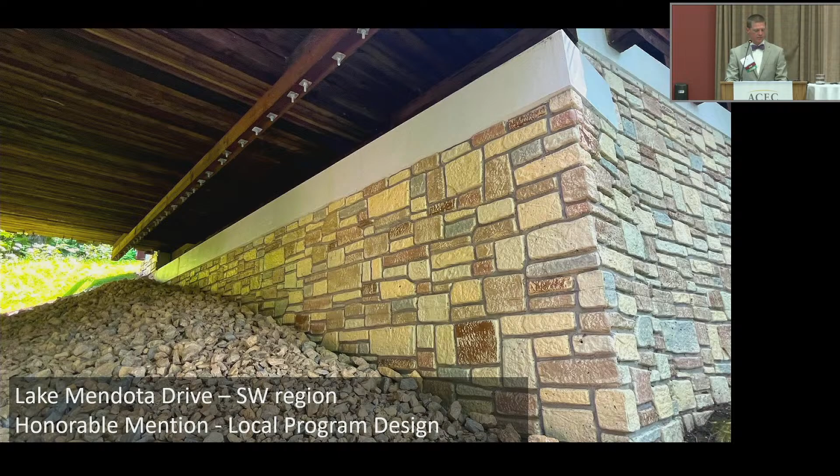Timber isn't usually selected because of its capital cost, but it's perhaps underappreciated for its durability, especially in Wisconsin's climate, sustainability, and low maintenance needs. From concept to construction, the Lake Mendota Drive project embodies a well-rounded approach to cost-effective design, community responsiveness, and sustainable practices. And well done, Chad Halverson from KL Engineering and Zach Parison from WisDOT. The judges recognized this project with an honorable mention.

And now, from the Southeast region comes the West Walnut Street project, a project that went above and beyond a typical road diet to address serious concerns in a community. They did it on schedule and within their budget. Would you please come on down, Greg Haferman from WisDOT, Andre Ost from Graef, and David Tapia from the city of Milwaukee. You are this year's winners, Best Local Program Design.

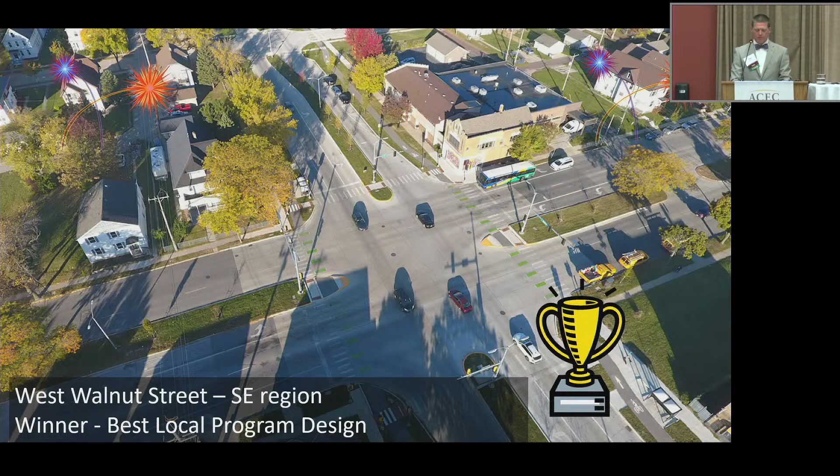This is a heavily traveled arterial in Milwaukee, 0.6 miles long, including 9 intersections. When existing pavement and utilities had to be replaced, this team took the opportunity to go after the serious problems of speeding and reckless driving. The KAB crash rate was 70% higher than the statewide average for local streets. The good news is that there are engineering solutions that can influence drivers' behavior. Here, lane reconfiguration was combined with bump outs, signal upgrades, and raised crosswalks.

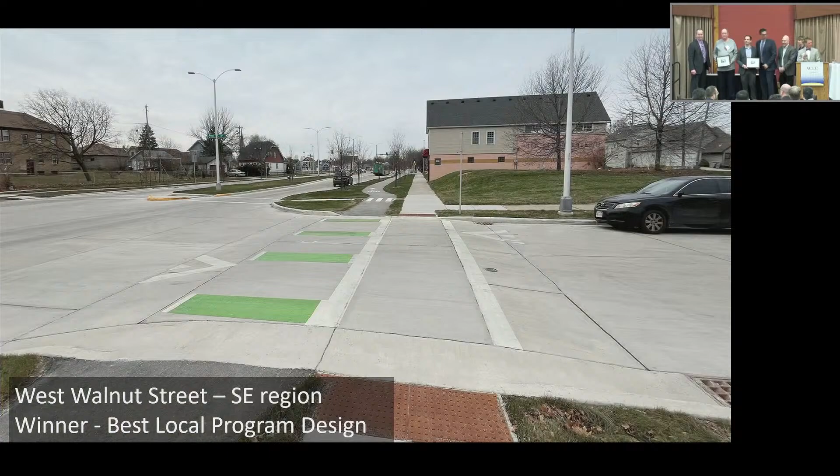But the cross-section isn't just the travel lanes. The design considered alternatives for the entire right-of-way and how it works for all users. Contributing to Mayor Cavalier Johnson's vision, the project adds new protected bikeways, that is, they're separated from the street, in addition to sidewalks. The reduced pavement footprint will require less ongoing maintenance, as will the low-cost landscaping elements, including grass and street trees. Less pavement also means less stormwater to have to manage. The judges appreciated just how many elements were considered in this real reimagining of an urban corridor. So congratulations to the West Walnut Street team for being this year's winners.

Well, and there you have it. Ladies and gentlemen, the 2025 Design Awards, 27 nominees and 8 winners. I hope this little tour gave you some inspiration, perhaps some ideas for your own projects. If you reach out to me, I'd be happy to connect you with any of the PMs who you saw today. And to those of you online, thanks very much for joining us.

I'm sure you've noticed there's a ton of turnover that's been happening in the industry, so it's as relevant as ever to talk about our best projects. And our worst ones too, I suppose, if I'm honest, but I know it may take extra effort, but it's imperative that those of us with more experience take time to share it with our newer colleagues, and that each of us do our best to listen to what our public is asking from us today.